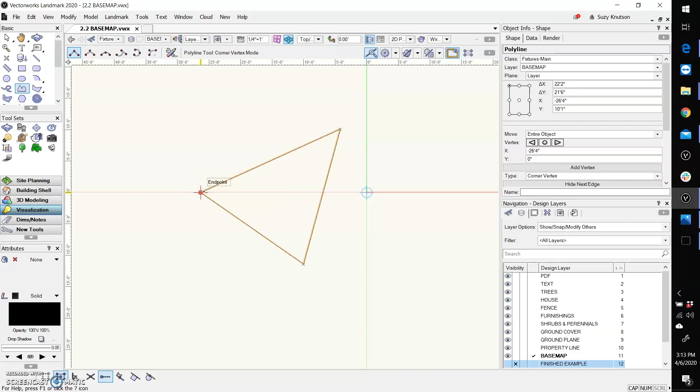Now if I were to go ahead and use the line tool, if I've accurately plotted where those loci points are, I can now just easily click and draw it anywhere in between those points. So essentially a loci is just defining an area in space.

I would prefer for this lesson that you guys go and measure just a very small area of your yard. It's good to be able to see a site, measure a site, and then draw the base map for the site, because going through each of those steps is just going to reinforce the learning, as opposed to if you use my measurements, which are available on D2L, you're really just skipping the step and only processing and getting the measurements into Vectorworks.

Anyway, that's my spiel about preferably you should be doing your own measurements. I think that's going to be beneficial to you. But I did want to show you what my measurements look like.

When I draft, I preferably start with a baseline. So you can see right here at 0,0, that's where my baseline begins, and then all measurements go along this axis point. So that's how I'm going to be drafting this one. You're welcome to look at this, and we'll periodically go back to these measurements.

I believe the first thing we should probably do is draw this line right here. So this whole thing right here is a driveway. Then there's a planting area that has a retaining wall all along those edges, and then the neighbor's house is right there. It was important to record where the windows of that house are — there are two windows we're looking at, and they also have a big fan that's part of their central heating or cooling system.

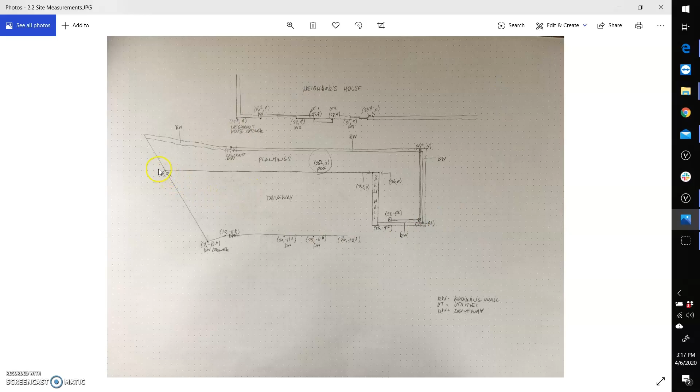That's important to know for screening purposes here. Basically, we're going to take a look at this. We'll get the driveway drawn in first using the axis points, and then we'll take it from there.

Going back into Vectorworks, I need to go ahead and place my first point, this is going to be 0,0 essentially, or I could even make this more accurate. So if I place it right smack dab in the middle of the drawing where that blue bullseye is, you can see up here that I am at 0,0.

What I like to do is leave one 2D loci in the center, and then I just keep clicking them on top of that, and move them from there. So let's go back to the drawing and look at the first point that we're going to move. There's a stem wall or curb at the end of that driveway, and you can see that it's at 35.5 feet along the x-axis, and 0 along the y-axis, meaning it's perfectly in line with 0,0.

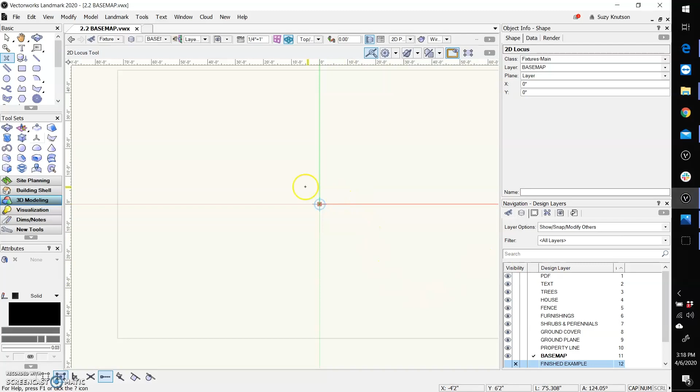Let's come back in here — I've already popped in my second 2D loci, and then I can come up here. There are a couple different ways you can move your 2D loci point. The first one I'm going to show you is up here in the object info palette. I'm just going to type in 35.5 feet and then tab, and it moved that point for me.

Then if I go back to the drawing, I can look in here and see — this was recorded using an engineer's rule, so 0.5 is not 5 inches, it's half of a foot. I can see that from this point to this point, the thickness of that stem wall is 6 inches.

So I'm going to go ahead and draw that stem wall. Looking down here, if this is the x-axis, I'm stopping at 36 along the x-axis, and going down negative 9 feet 2 inches. So let's go ahead and record that stem wall.

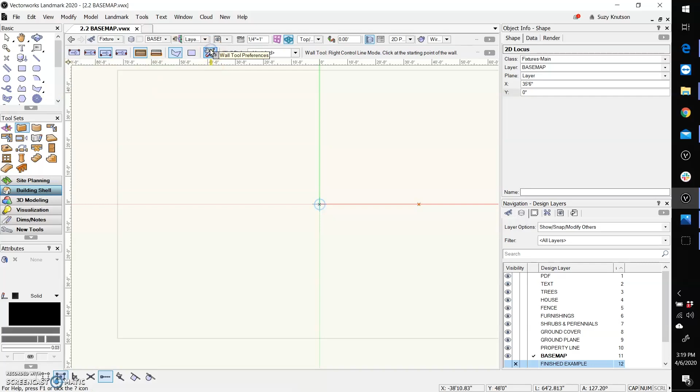To do that, I'm going to use my wall tool. You don't have to, because base maps can essentially be really simple line work, but normally you're going to have to come back after the fact and add walls anyway, so I'll just go ahead and do it now. I entered into the tool preferences for the wall tool because I want to make sure the wall I'm drawing is 6 inches thick. That's good — click OK.

Then I'm going to click that locus point in order to start my wall, and I'm paying attention to the side of my control line, so the right control line.

I'm going to hit tab once to enter the length, which is 9 feet 2 inches, with the angle set at negative 90 degrees. Then I'll hit enter twice to accept it, since it wanted to draw the second leg of that wall. It's always a good idea to go back and measure to make sure it entered correctly, and using the tape measure tool, I can confirm that is 9 feet 2 inches.

Now I have the beginning of my driveway, and I can use the line tool. Essentially you're just playing connect the dots. So we've made that dot. Now there's a bit of a curve on the other side of the driveway, so I need to enter in those points.

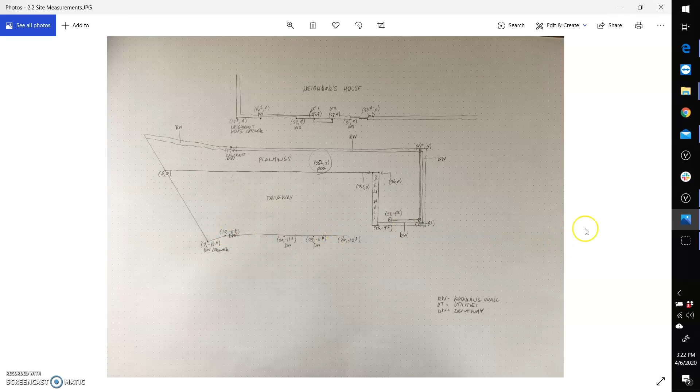So we're going to create a grid so that we know where those 10-foot increments are. To do that, we'll come back to the drawing and I'm just going to draw a straight line through 0,0.

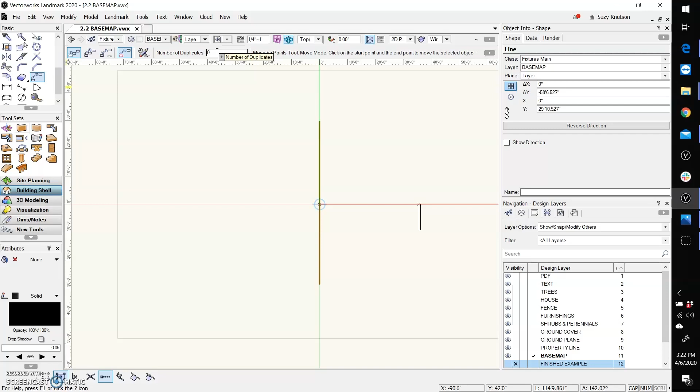Then I'm going to use the Move by Points tool right there. I want this first one, the Move mode, because it allows me to enter the exact spacing I want between all my lines. Then I'll come over to the number of duplicates and do this at 10 foot increments. In the end, I only need 3 duplicate lines.

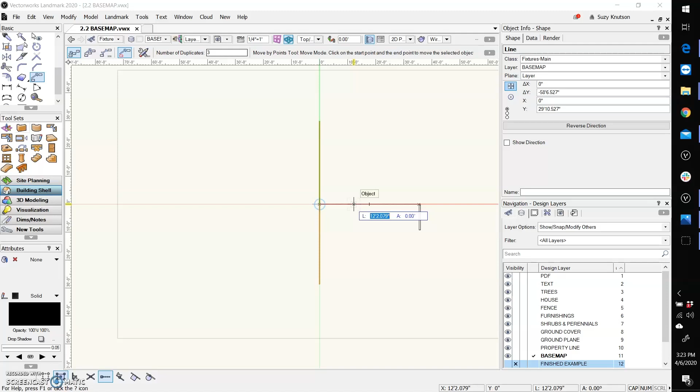So I want 3 duplicates of this line. With that line selected, I'll click once where I want that to originate from, then drag in the direction I want it to go. Click tab to enter the length, and since I want my grid spacing to be 10 feet, I enter 10 feet, hit return, hit it again, and it evenly spaced all those lines.

So speaking purely about the x-axis, this is 0x, 10x, 20x, and 30x. I don't have measurements in my drawing that move at such regular intervals along the y-axis, so I'm not going to create new grid lines in that direction, but you would do it exactly the same way.

I've probably skipped over something I should have mentioned, but if this is your x-axis running in this direction, there's a difference between a positive and negative number when moving along any of these axes. Going from left to right is a positive number, but right to left is negative. For the y-axis, a positive number moves you up the page, whereas a negative number moves you down the page.

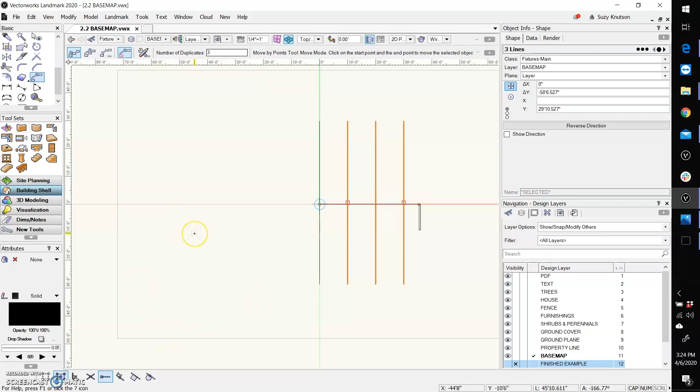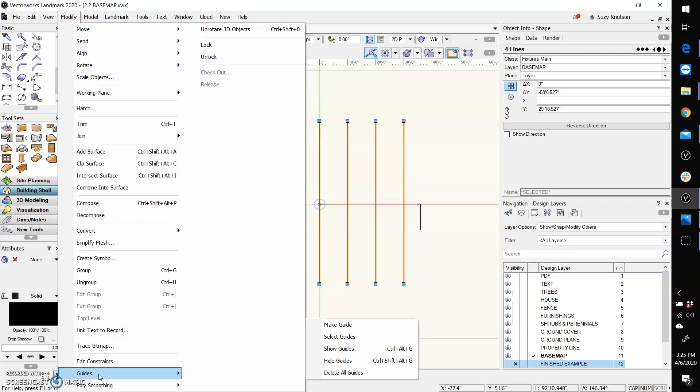Okay, going back to our grid, if I select all of my grid lines that I'm going to use as a drafting aid, I come over to the Modify menu, down to guides. I've been calling this a grid because that's essentially what I'm making, but I'm going to tell the software this is a guide, so I'll go Make Guide.

Essentially all that did was give me 4 lines that, if you look over here, are locked. I can click those lines but they're locked, meaning I can't modify that line in any way. Let's try clicking and dragging and it just won't let me. So now I have a nice grid, and you can modify that grid for whatever makes sense to you.

You can use this not only in Basemaps if you used a baseline measurement where you recorded a curve at regular intervals, but also if you're looking at the lines on the house you want to align to. You can go ahead and make grids based on that.

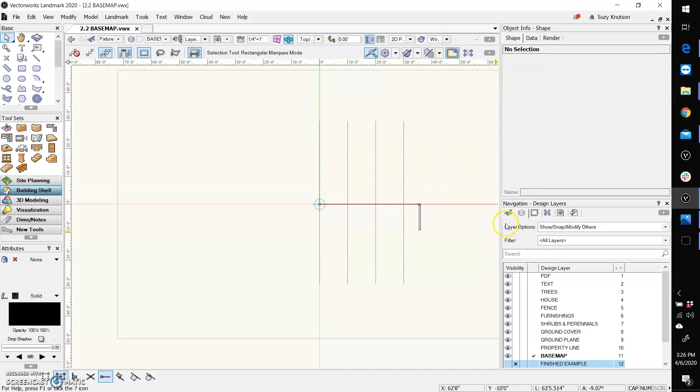It would be a good idea, if you're going to do that, to have a specific layer or a different class. You can see this actually auto-classed as a guide - that's not a class I created. So I could come over in the navigation palette, look for the guides class, and turn that off. That way I don't have to delete my guides - they can just exist in my document, but when it comes time to make a sheet layer for presentation, I can make sure that class is turned off so it won't be presented.

So that's how guides work. In the next video, we're actually going to go ahead and place some of those points to make up the curve of that driveway.